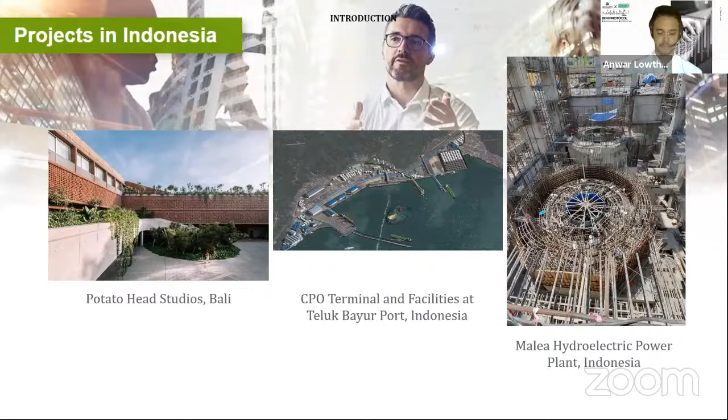Sorry about that. So before going on, I just wanted to mention that the following presentation is my opinion only and my personal interpretation of what good looks like within BIM. So take my lessons with a grain of salt.

When I was thinking of how best to structure this presentation, I knew there were a few people from Aurecon listening in today. Even though we follow the ISO closely, I always get people asking me, what is the ISO? So today I thought I'd talk about the ISO in a way that I wish I'd known when I was starting to learn it, and talk about three main things: what is BIM, what is the ISO, and then we'll summarize all of that.

So let's start with, what is BIM? BIM is not Revit. That is to say that Revit is an authoring tool, and authoring tools make up a part of BIM. Other parts include analysis, 4D, 5D, and data. We consider all of these as enabling softwares that help supplement BIM as a process.

If you were to ask me, I believe BIM is the concept that attaches data to 3D objects. This is what differs BIM from CAD. If I could personally summarize what I thought BIM was, I'd say that BIM is data disguised as 3D objects. That's a quick introduction into my opinion of what BIM is.

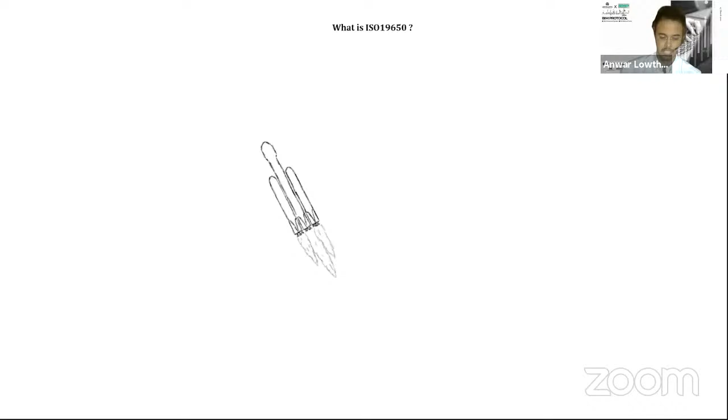So what is the ISO 19650? I like to look at the ISO as if BIM were a rocket ship with many components. What does every good rocket ship need? A user manual. So if BIM is the rocket ship, then the ISO is the user manual.

As we've established previously, BIM becomes a very powerful tool, especially when you zoom out and look at the whole picture. Typically, a BIM workflow pretty much always follows this pattern. The client establishes standards, which typically informs the governance of the project. Consultants such as architects and engineers begin authoring, creating 3D models.

BIM managers begin to analyze these models, such as running clash detections. Then, within the common data environment, a place exists now for gateways and approvals, where model enrichment occurs until it's ready for construction. Then finally at handover, the model is used for asset management. So at a very high level, this is what a typical BIM workflow looks like in a nutshell.

However, asset management and the digital twin is its own workflow, and this is separate from what we know as within the common data environment. However, this is a topic for another day.

This general workflow is elaborated on in the ISO 19650, where we have the beginnings of a standardized BIM workflow, finally. This diagram summarizes the ISO part 1 and 2. It's a difficult pill to swallow, but we're going to break it down now, and we'll come back to this diagram at the end of this presentation, and hopefully it will all start to make sense.

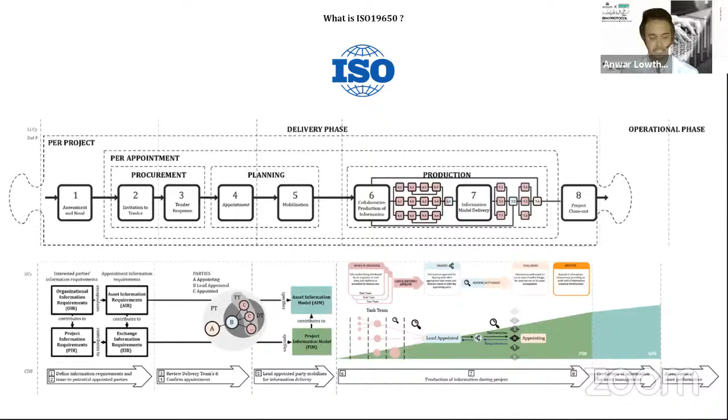As mentioned earlier, the ISO has two parts: part 1, concept, and part 2, workflow. Let's start with part 1.

Part 1, concepts. A few key concepts tackled in part 1 are defining the stakeholders. This spiderweb diagram shows this relationship. Now let's zoom into a section.

We have the client, known as the appointing party, the BIM manager, known as the lead appointed party, and the consultants, architects, and engineers that make up the appointed party. Try to remember these stakeholders, as we will be coming back to them later on.

So what other concepts are covered in the ISO Part 1? The ISO Part 1 introduces the concept of the PIM and AIM. So we have the PIM, known as the Project Information Model, for the design phase, and we have the AIM, known as the Asset Information Model, for the operational phase.

If you've read the ISO, then you've likely seen this confusing diagram. But what do all these arrows mean? And how does it all link together? That is where the ISO Part 2 comes in.

Part 2, delivery, or as I like to call it, workflow. You'll see this image a lot during this presentation. It's the ISO 19650 Part 2 workflow. We are going to break it down into two parts. The first part is procurement and planning.

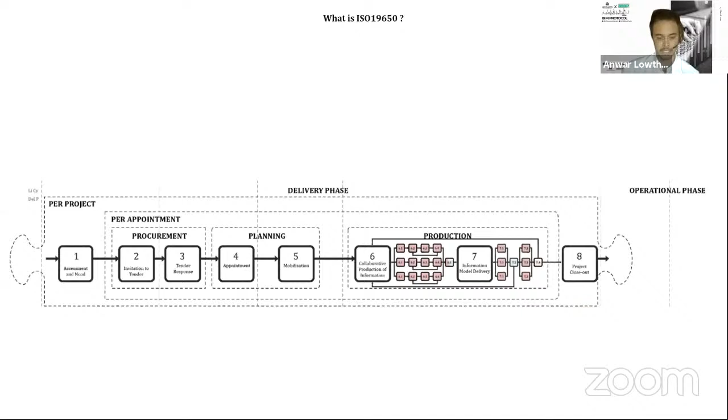Going back to the diagram, now we're going to talk about the second half, production. This is where the CDE, also known as the Common Data Environment, comes into the picture. In this example, we've used BIM 360 as our common data environment. This section explains the acceptance and review process of models within the common data environment.

First, between the consultants and the BIM manager, where the BIM manager reviews and sends back the models to the consultants to edit and enrich as required until the BIM manager has deemed it acceptable. Once accepted, the BIM manager sends the file for approval to the client. The client then receives and sends back or accepts as required.

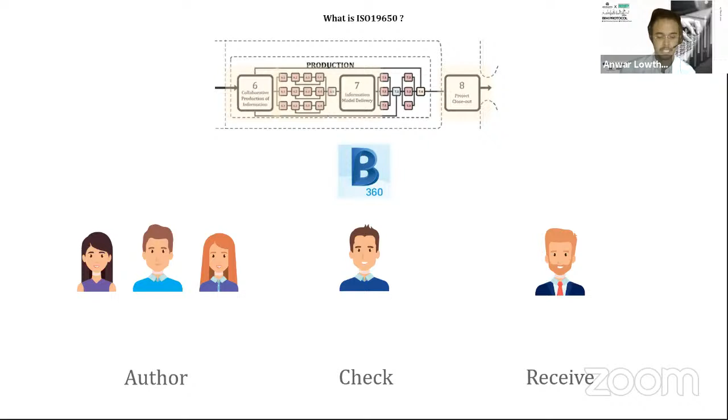So, in a nutshell, this is the second part of the ISO 19650. Again, these are very simple terms. As you can see, the ISO is really a management process. We at Aurecon kind of describe it as a relationship guidebook, because what it essentially is the relationship between the client, the BIM manager, and the varying consultants.

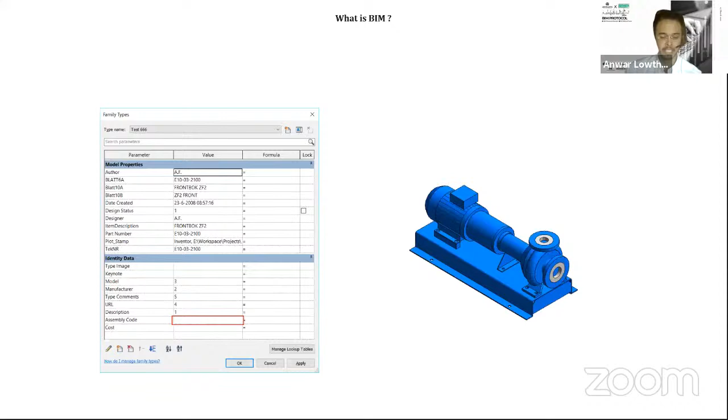So let's summarize. What is BIM? Again, BIM is not Revit. BIM is a concept made of multiple parts. These parts exist to supplement BIM's core ability, that ability being to represent data in 3D space as objects.

What is the ISO 19650? The ISO 19650 is a workflow made up of 8 key project stages, the first half of which look at procurement and planning, and the latter half look at production, as explained earlier.

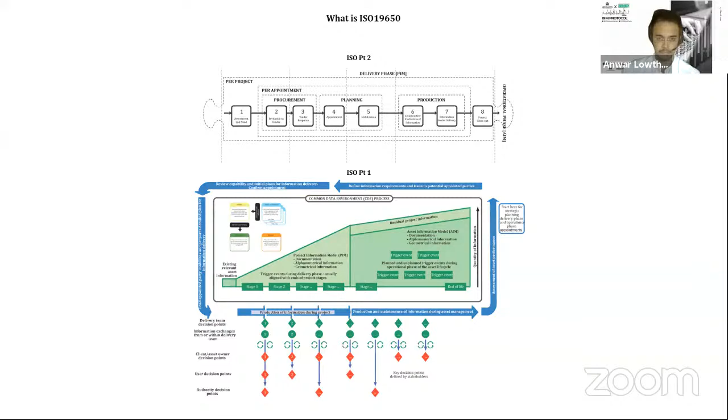Now, looking back at this diagram, I'm hoping it's starting to make a bit more sense. Here it is all together. Hopefully now that we are revisiting it, you have a better understanding of how the ISO relates to the BIM workflow as a whole.

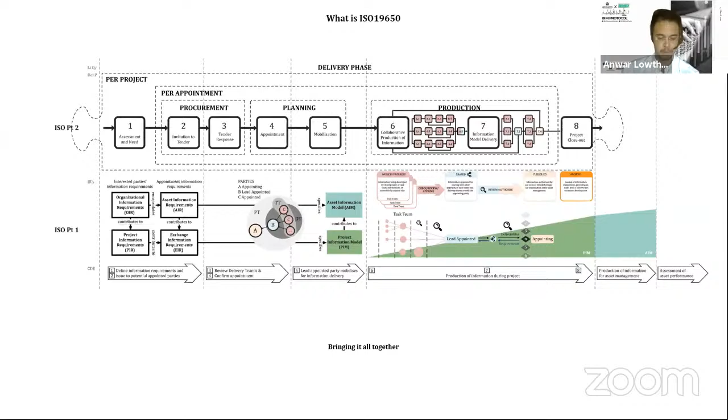Wilson Ong, as a subject matter expert in this field, will surely elaborate on this process and talk about the future of these standards. Thank you for your time, and I hope that gave you a brief and simple way of understanding roughly what the ISO is about and its relationship to architecture and engineering and BIM as a whole.

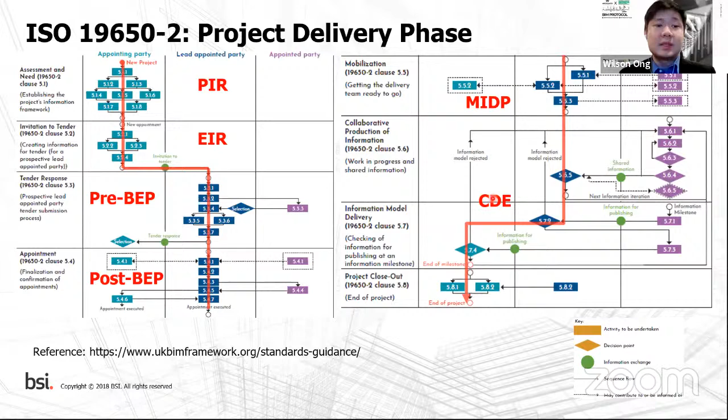This covers the ISO 19650 Part 2 project delivery phase. Now I'll move on to ISO 19650 Part 3. As we know, BIM usage isn't only about the project delivery phase but also the operational phase. The framework of ISO 19650 Part 3 outlines examples of three possible scenarios so that the asset information models stay up to date in an orderly fashion.

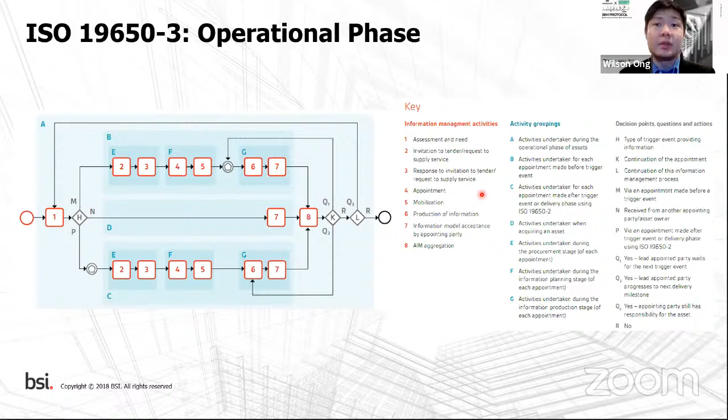As you can see, pathway B and C are very similar to what I presented earlier for the project delivery phase, and I think Mr. Anwar shared similar terms in his slides too. Even without coordinating with Mr. Anwar, we're already speaking the same language—that's how powerful a standard is.

The difference between pathway B and pathway C: both are similar to the project information delivery, but pathway B has a trigger event that starts after mobilization, whereas pathway C starts at the beginning. This plots the three basic common scenarios.

For example, if you have a very useful information model to build the building, you manage to save a lot of cost and time. After the project information model is converted into the asset information model, what happens if you don't maintain it? It automatically becomes less useful.

ISO 19650 Part 3 guides you to identify terms like trigger events so you know what to do. For example, with minor maintenance or minor renovation, like pathway B shown in the green box, you just update the model accordingly. But for major works, renovation, or extension, you need to go through the whole project delivery phase again.

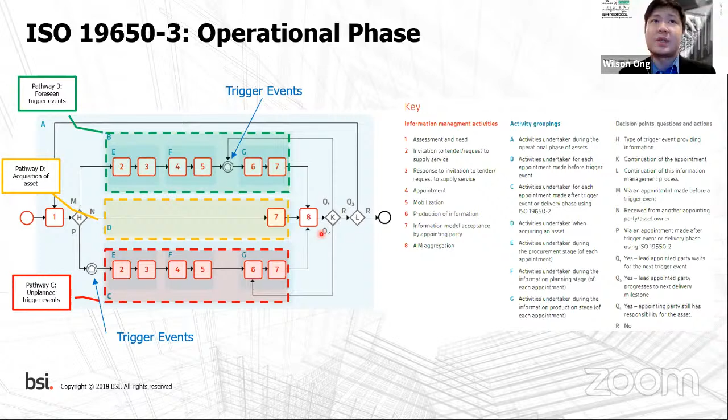As promised, I will share a very useful website where you can get bite-sized information of what has been shared today. Search for UK BIM framework, which is co-organized by BSI. You will get many useful literatures for part 1, part 2, part 3, until I believe part 6, though part 6 isn't fully completed yet because it's still quite new. We even have useful information if someone already understands PAS 1192 part 3 and wants to convert it into ISO 19650 part 3.

So in short, why standardized workflow? We are using common terms right now, so automatically if somebody knows the ISO and I know the ISO, we can gel. We have greatly reduced the learning curve, and most importantly, having a standardized, well-documented process makes this auditable.

Auditable means it can be reviewed, checked, and improved, so that's why it comes with continuous improvement. BIM is not only about technology but mainly the process. Technology will be replaced from time to time, but the process, the framework, has to be there. So if any technology changes, you can use the existing workflow or procedures and alter it. That's what I mean by auditable and continuous improvement. This makes you very adaptive to any new software or technology, you can adapt to it very quickly. That's the whole idea of a standardized workflow, and you are getting in line with the international standard as well.

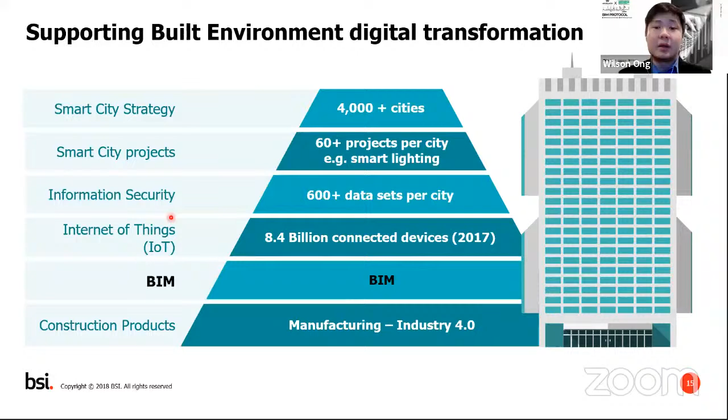So just to share with you, I did share some bite-sized information, the link as well for the website. We at BSI, if you'd like to know more about standards, we do offer a couple of public trainings, and we have newly launched our BIM qualification program.

Just to share with you a bit more about this personal qualification, it involves a series of courses where an exam is needed to be taken in order to be qualified. So we have the first level of qualification, which is the practitioner and the professional. And we are currently working on the certified professional, which actually showcases how you can demonstrate all of the knowledge you learn and apply it to your project.